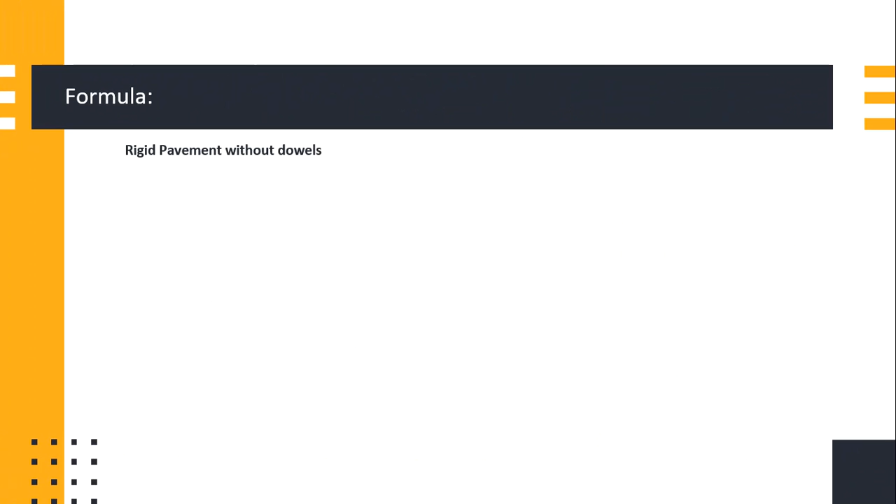Before we proceed to problem solving, bibigay ko muna yung mga formula na kailangan nyo. Rigid pavements without dowels: T is equal to square root of 3W over F. And rigid pavements with dowels, dalawa yan: T is equal to square root of 3W over 2F at the edge, and 3W over 4F at the center.

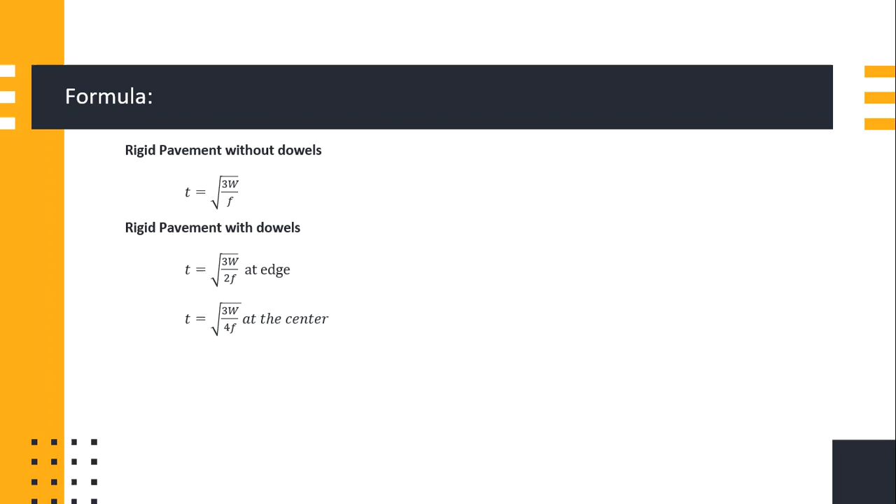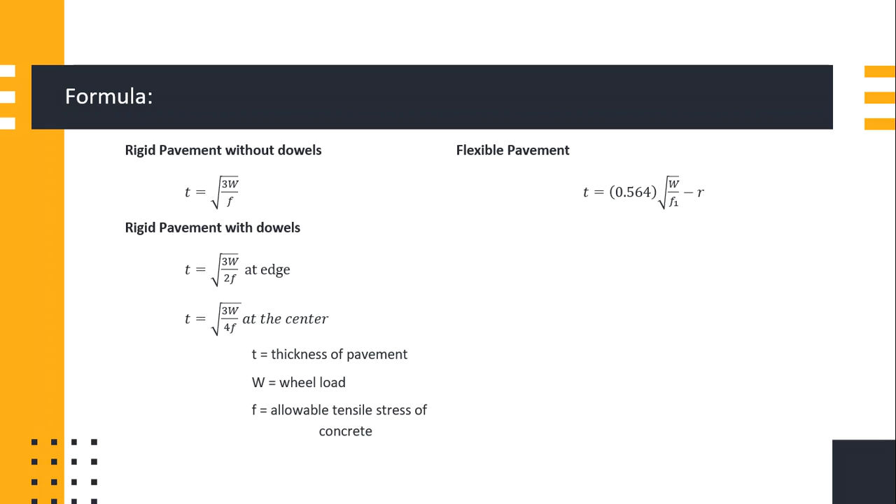Where T is the thickness of the pavement, W is wheel load. Wheel load in kilonewtons, thickness in meters kung nasa metric system tayo. And F is allowable tensile stress in MPa. Flexible pavement: T is equal to 0.564 square root of W over F1 minus R. Thickness of pavements pa rin. F1 is the allowable bearing pressure of subgrade. R is the radius of circular area of contact between the wheel load and pavement.

Para mas maintindihan nyo yan, mamaya i-explain ko na lang. And this one is the thickness of pavements in terms of expansion pressure. Hanapin nyo na lang yung meaning ng flexible pavement, yung subgrade, expansion pressure. So, T is equal to expansion pressure over pavement density. Mga yan naman is given. Madali lang talaga siyang gamitin.

Stiffness factor of pavement is equal to SF. SF is equal to cube root of ES over EP, where ES is modulus of elasticity of subgrade and EP is modulus of elasticity of pavement.

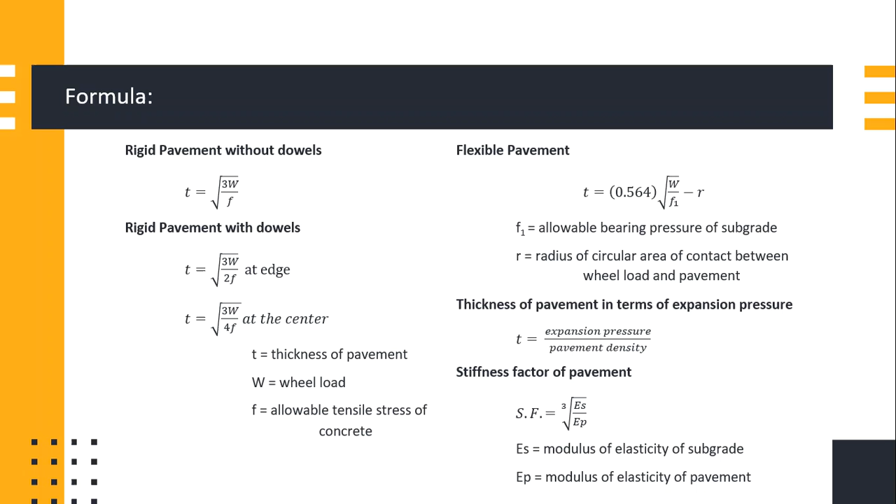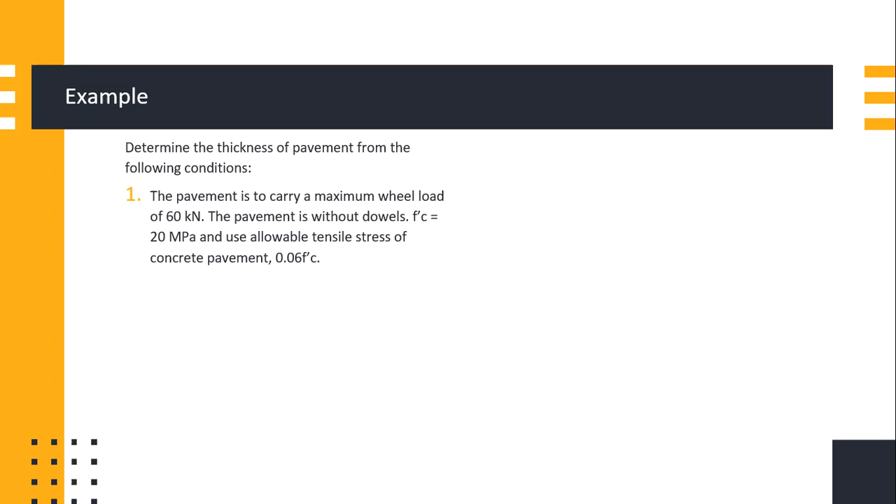Napakadaling problem. So, determine the thickness of pavements from the following conditions. Number 1, the pavement is to carry a maximum wheel load of 60 kN. The pavement is without dowels. So, anong gagamitin nyo? Kung kanina, binigay ko na yung mga formula, hanapin nyo na lang kung ano yung kailangan nyong gamitin. Dahil dito without dowels, yung unang formula ang gagamitin natin. So, FC prime is equal to 20 MPa and use allowable tensile stress of concrete pavement 0.06 FC prime.

Number 2, the concrete pavement has a density of 0.0025 kg per cubic centimeter and expansion pressure of 0.15 kg per centimeter squared. So, yan. Nagmamadali ata ako dito.

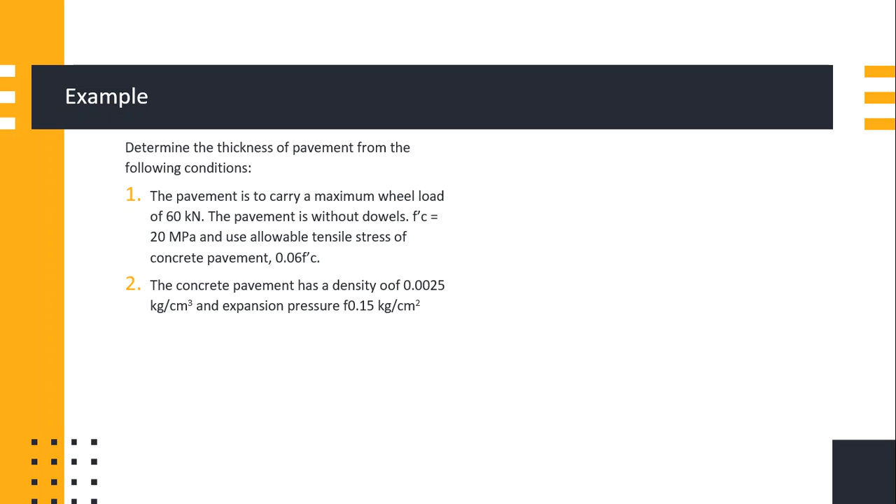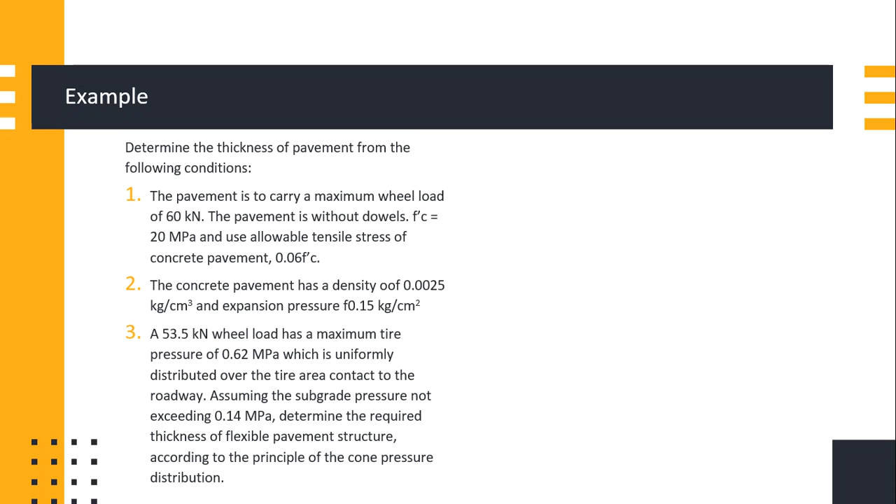Number 3. A 53.5 kN wheel load has a maximum tire pressure of 0.62 MPa, which is uniformly distributed over the entire area. Tire area contact to the roadway, assuming the subgrade pressure not exceeding 0.14 MPa. Determine the required thickness of flexible pavement structure according to the principle of the cone pressure distribution. So, kung ano lang yung binigay ko kanina, formula yun lang yung gagamitin nyo.